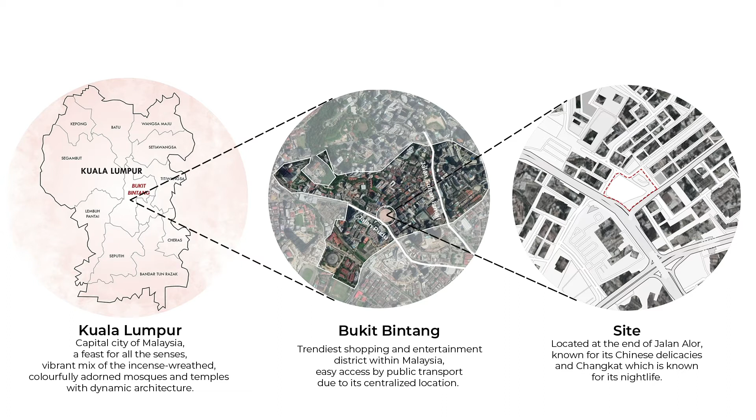Bukit Bintang itself is an enclave of Kuala Lumpur, harbouring many beautiful layers of life and forms within a developing urban setting. A city of movement, the life in Bukit Bintang never ceases, beating even until dusk, where the street lights and another new side of life start beating again until late night. However, in current pandemic times, it has also cast a large shadow while the public remains unaware of the many hidden perils of the site.

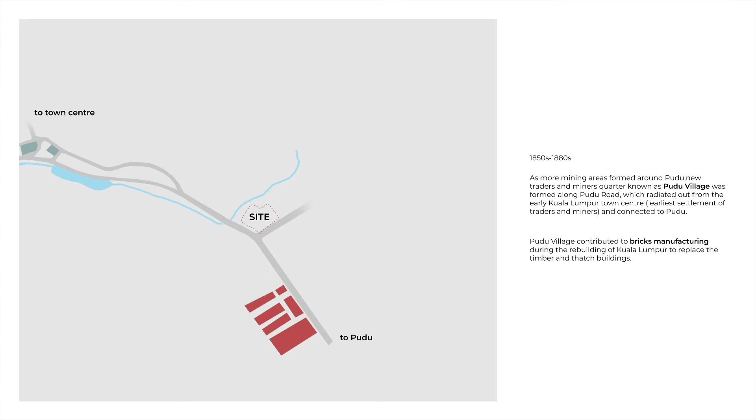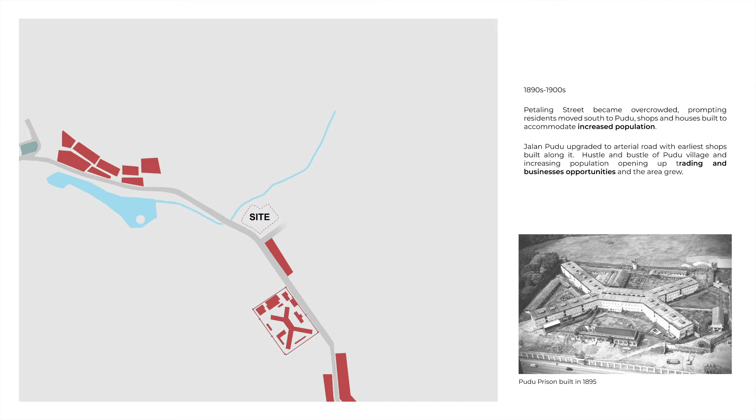In the 1850s to 1880s, as more mining areas formed around Pudu, new traders and miners' quarters known as Pudu Village were formed along Pudu Road, which radiated out from the early Kuala Lumpur town centre and connected to Pudu. However, in the 1890s, Petaling Street became overcrowded, prompting residents to move south to Pudu, and shops and houses were built to accommodate the increased population.

The increased population at Pudu settlement opened up trading and business opportunities, and the town grew. In the 1950s, after World War II, forest and agriculture land were cleared for commercial development, more Chinese residents and traders moved in, and low-rises, shophouses and housing were built for increased needs. Over time, the enclave became economically self-sustaining.

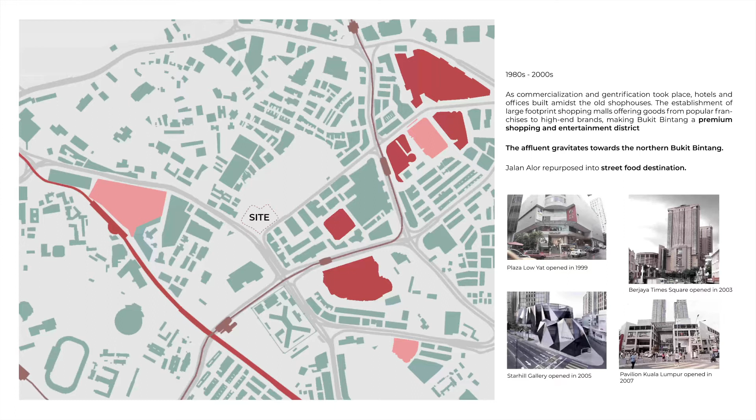In the 1980s to 2000, commercialization and gentrification took place. Hotels, offices and malls were built amidst the old shophouses, making Bukit Bintang a premium shopping and entertainment district. The affluent gravitated towards northern Bukit Bintang, and Jalan Alor was repurposed into a street food destination.

From 2010 to 2020, Greater KL became one of the national key economic areas. Urban connectivity of the Southern Golden Triangle was enhanced further. Bukit Bintang MRT station was built to strengthen business activity, and the migrant worker population grew in parallel with increased job opportunities, making it a city of migrant workers and locals.

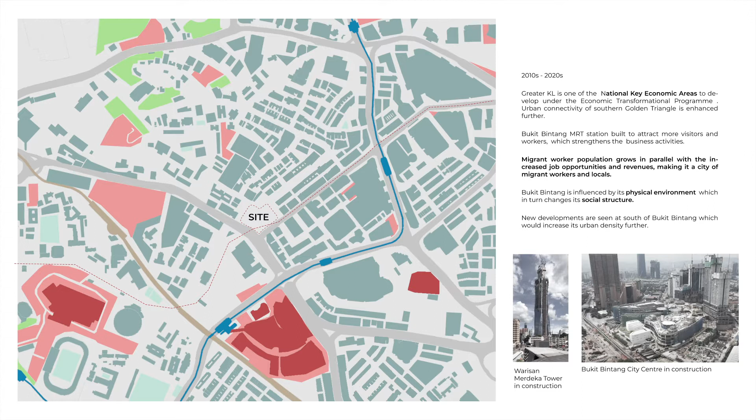The pedestrian pathway can be seen using different transparency of lines to indicate the densities of pedestrians from morning, afternoon and nighttime. High density pedestrian pathways are usually found along shop lots with a lot of attraction from the surroundings, while low density pedestrian pathways can be seen along the back alleys of the shop lots. The density of pedestrians highly depends on the activities in the surroundings, as these act as an attraction.

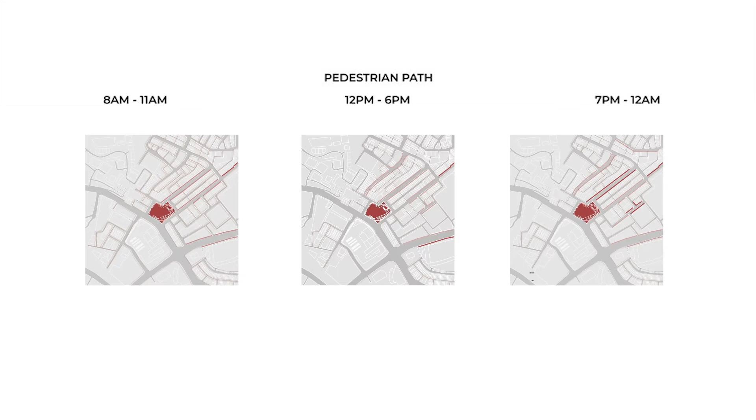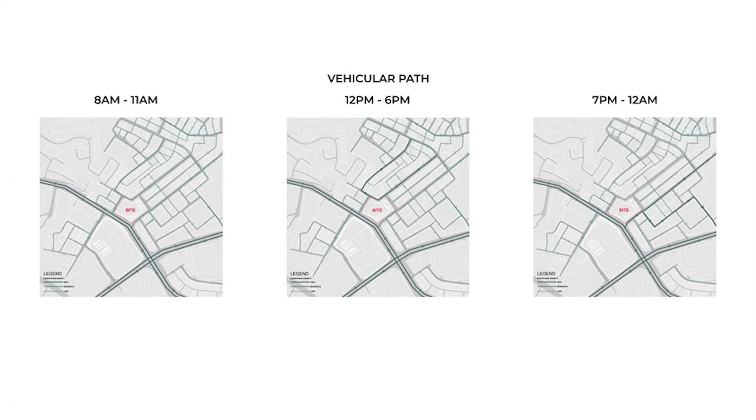The vehicular path can be seen at its peak densities in the afternoon during lunch hour, and before the night market starts along Jalan Alor. Jalan Sultan Ismail and Jalan Bukit Bintang can be seen with high vehicular densities, from the morning when people head off to work until late night when people go shopping as well as having their dinner.

The pedestrian density of Bukit Bintang consists of a huge contrast between daytime and nighttime. Social gatherings are observed more during nighttime, especially in Changkat Bukit Bintang and corners of Jalan Bukit Bintang. Meanwhile, Jalan Alor acts as a hotspot for locals coming to experience the food at night. The streets also indicate more migrant pedestrian density during noon, in preparation for the night activities.

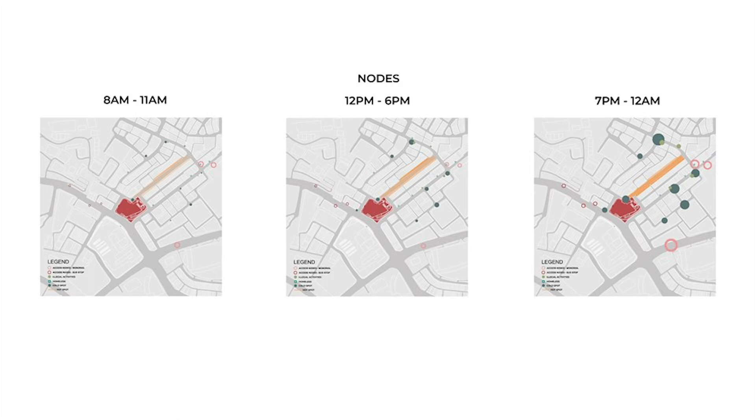Furthermore, homeless beggars are found within Jalan Bukit Bintang and Changkat Bukit Bintang during both day and night, whereas illegal activities increase more during evening and nighttime.

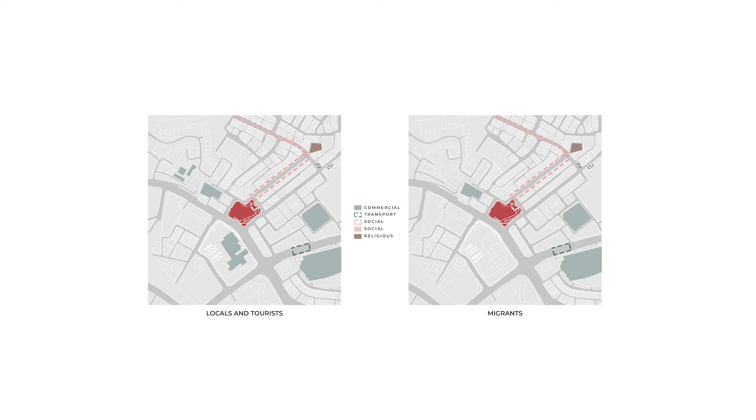As landmarks are objects or features of a landscape or town that are easily seen and recognized from a distance, different users tend to have different perspectives on what places they identify as landmarks. For locals and tourists, common landmark identifiers are Low Yat Plaza, Times Square, and even the Chinese Hill Maternity Hospital and the KL Baptist Church.

Let alone for the locals in the area, the Jade Garden apartment is known to be a residential area for some of the locals within the site. Jalan Alor is also known as one of the main social landmarks for locals, tourists and even migrant workers, as the street functions to serve most of the users, many of whom work there as migrant workers. In addition, next to Jalan Alor resides the residential area for the majority of the migrant workers.

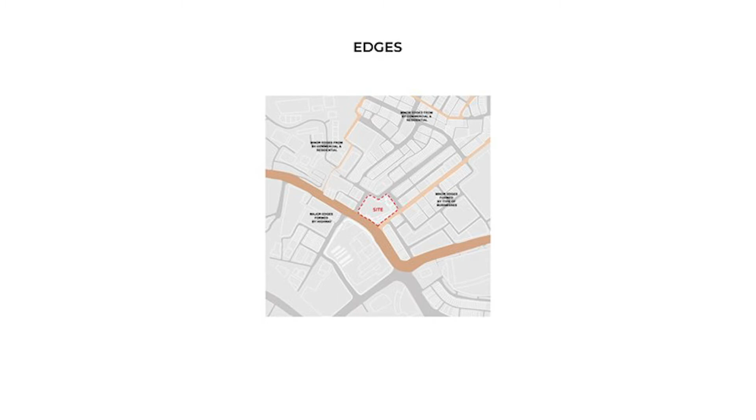The major edges can be seen along Jalan Pudu all the way up to Jalan Imbi, as these edges are formed by the highway. On the other hand, the commercial and residential area also forms a minor edge, while different types of activities and business happening in the area also form another minor edge. This clearly shows that major edges are permanent edges, while minor edges depend on ongoing activities and business in the area. The user groups around Site B are generally categorized into three categories.

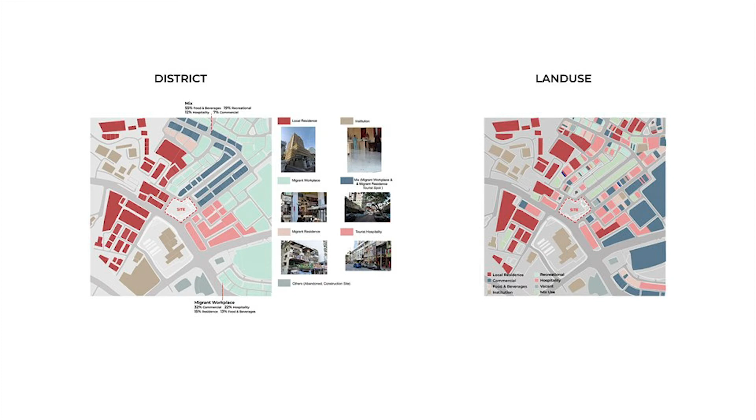Which are the local, migrants, and tourists. The district of the local is mainly residential and is surrounded by institutions such as schools and hospitals. Majority of the migrant district overlaps with the tourist district, as most migrant workers work in the commercial sector in tourist districts such as restaurants, massage parlours, and hotels.

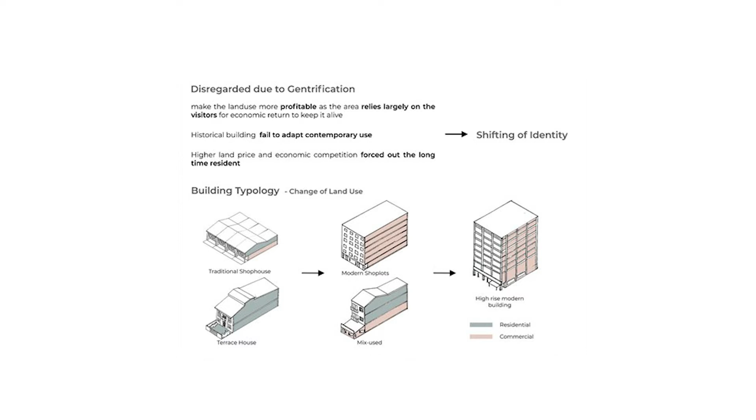The physical design of Bukit Bintang is mainly aimed at creating a high-end shopping precinct for visitors and business operators. Fine-grained shop house and housing typology allows denser urban streets and encourages higher intensity of life between buildings, which is slowly being replaced by coarse-grained modern buildings with larger footprints.

This transformation is due to gentrification. In order to make the land use more profitable, as the area heavily relies on visitors for economic return, historical buildings failed to adapt into contemporary use, making them less efficient and their utilization not optimal. High land prices and economic competition forced out long-time residents, resulting in the shifting of identity.

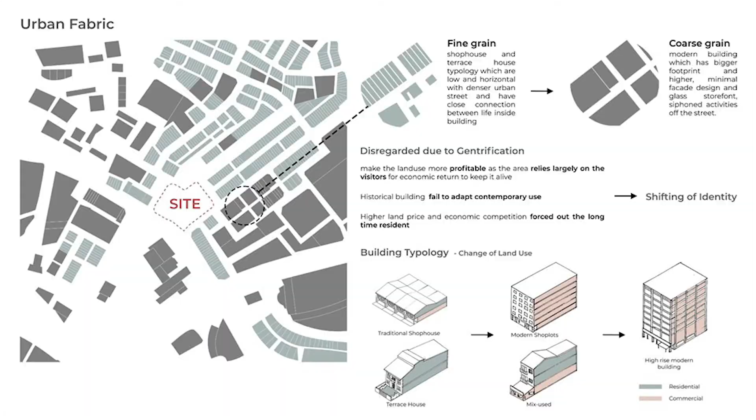Building typology and change of building use: the building typology starts with low-rise shop houses and housing built by Chinese residents, then transforms into vertical mixed-use buildings and shop lots with much bigger footprints, where commercial activity occupies the ground floor and the upper floor is utilized as living space for migrant workers.

Modern high-rise buildings in Bukit Bintang have fewer stores and activities happening at the ground floor compared to the surrounding fine-grain traditional buildings. Few traditional shop houses remain around the historical streets of Tengkat Tong Shin, Jalan Pudu, and Jalan Sin Chew Kee, in a poorly preserved state resulting in diminished cultural significance.

Modern transformation of Bukit Bintang as a shopping and entertainment district has ensued increase in population and financial profitability. Commercial and mixed development buildings of various scales replaced traditional shop houses, redefining the place's character.

Facade: building typology at Jalan Bukit Bintang has changed dramatically throughout the century, displaying a various collection of shop houses and high-rise buildings. The harmonious and continual visual quality along Tengkat Tong Shin is broken by modern structures, sudden changes of skyline, distinguishing from the humble traditional shop houses.

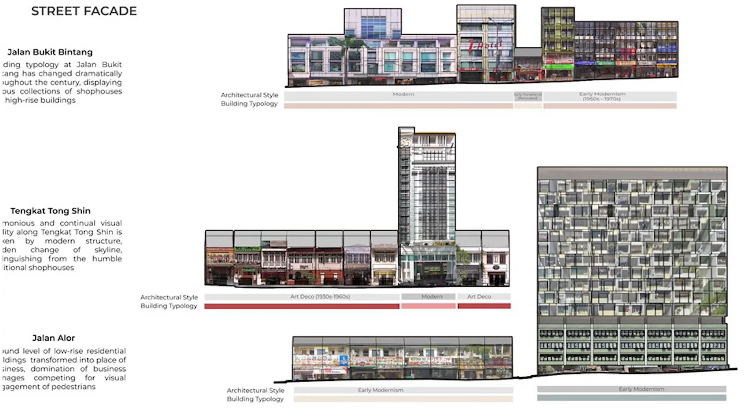The ground level of low-rise residential buildings transformed into places of business, with domination of business signs competing for the visual engagement of pedestrians. As Bukit Bintang becomes more compact and denser, social activities are encouraged at the front street. Main streets are vibrant with cultural reference and community identity, as house streets and alleys are being used.

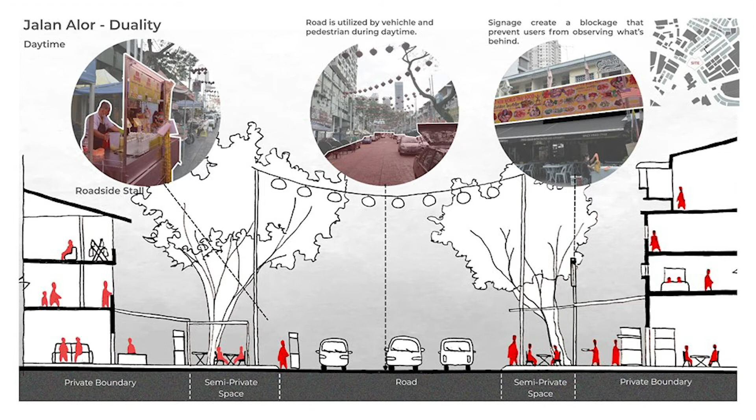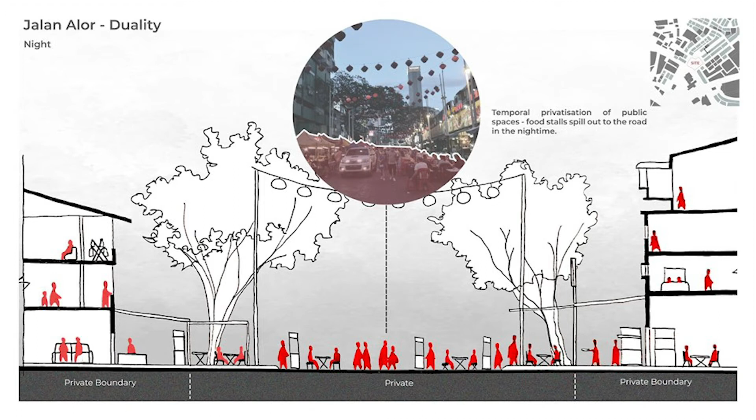Jalan Alor, duality: Jalan Alor is a famous food street with consistent low-rise buildings, giving a comfortable sense of enclosure. The land use starts off as residential and transforms to mixed use, with food and beverage businesses at the ground floor that extend all the way to the pedestrian path.

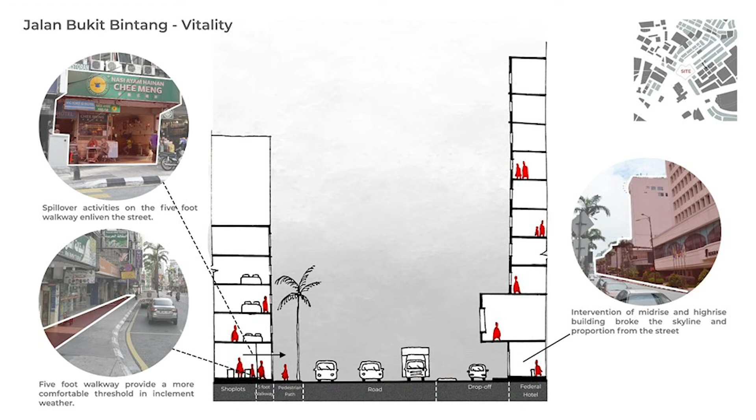Jalan Bukit Bintang, vitality: Jalan Bukit Bintang is a popular shopping street with high pedestrian and vehicle density. Spillage of business activity onto 5-foot walkways enlivens the street. The injection of modern mid-rise and high-rise buildings varies the skyline and proportion from the street.

Jalan Tengkat Tong Shin, belongingness: with the preservation of traditional terrace houses utilized for food and beverage business at the ground floor, it expresses the original characteristic of Bukit Bintang.

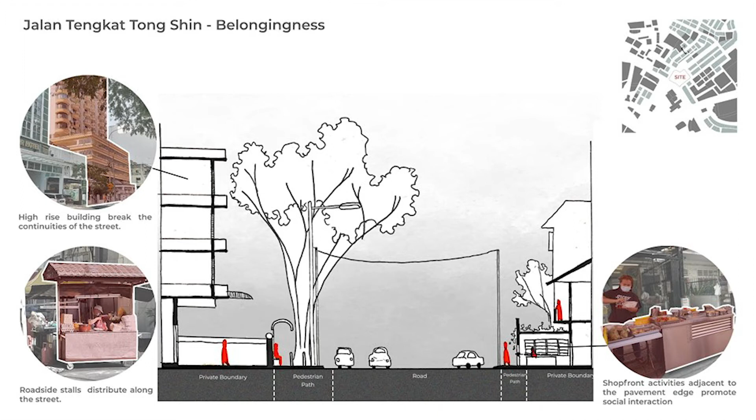Back alley of Jalan Bukit Bintang, confined: the back alley with a high level of enclosure is a transient space for pedestrians.

Jalan Rembia, vibrancy: Jalan Rembia as a back alley is rejuvenated through activities and purposes. The mural art makes a major contribution to giving the place character and identity, bringing people into and through places.

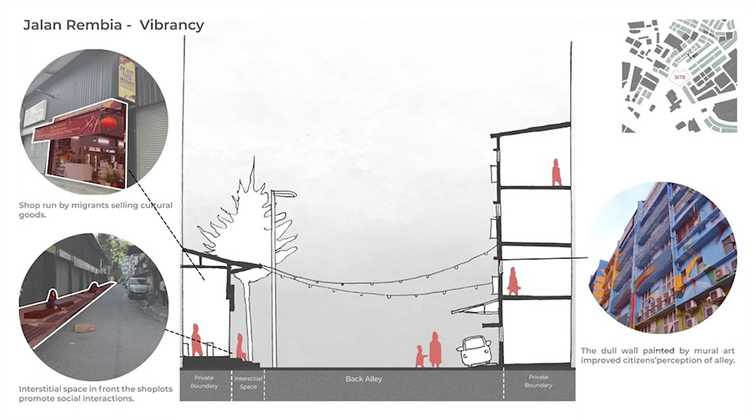For social aspects, it covers the different user group categories, which are the permanent insiders, temporary outsiders, observers, the human interaction, and the movement pattern as well as issues on site.

Behavior settings: in Bukit Bintang, the existing users are categorized as permanent insiders, temporary outsiders, and observers. Permanent insiders include local residents and local traditional business owners.

The current existing traces and presence of local communities is notably reducing due to the gentrification of economic and modern building developments. Seen from the local perspective, they are slowly losing their sense of belonging to the place, as nowadays youngsters are moving out from the old streets of Bukit Bintang, and the rapid frequency of building development leads to the fading traces of existing local pride.

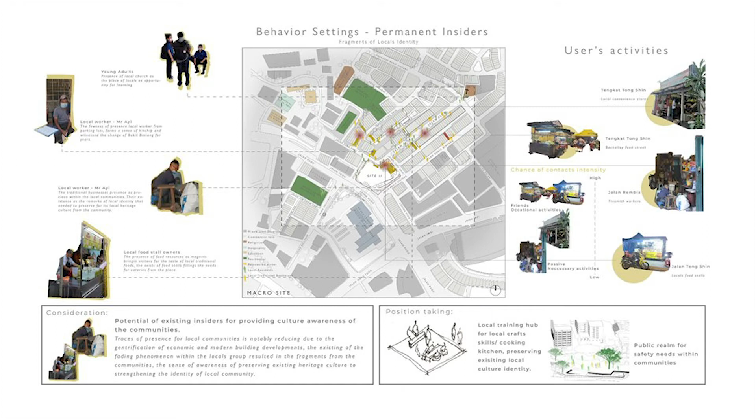Temporary outsiders: the existing communities of temporary outsiders include migrant workers and migrant residents, homeless people, drug addicts, and prostitutes. This user group stays in the old streets of Bukit Bintang for purposes or aims related to changes in economic status, leading towards the empowerment of economic stresses and social pressure from survival around the site.

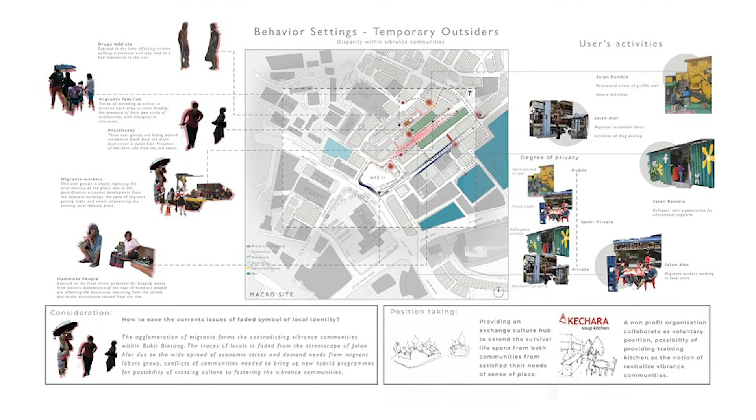With the appearance of vibrant communities comes the presence of a culture barrier, giving a downfall of impression onto the site. The migrant group are parasites within the old streets of Jalan Alor, living in between the conflict of cultural belief with local communities inside, creating two parallel dimensions of communities lacking the intersection between human cultural interaction.

Observers: the observers include tourists, local visitors, and students. The presence of a young adult user group from local communities and migrant communities forms their own educational institution, from their own formalizing way of educational institution.

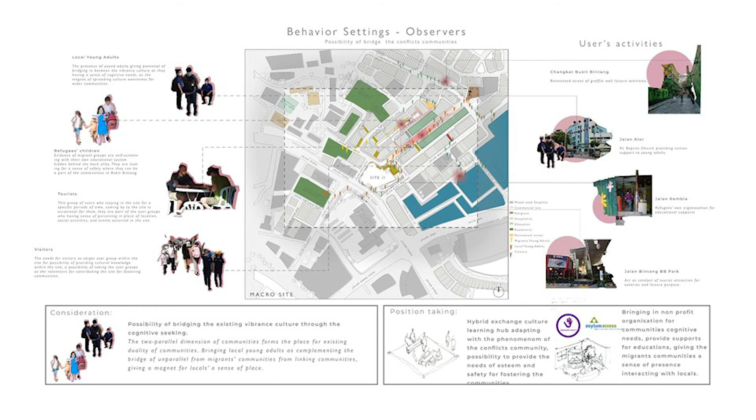The duality of existing communities is needed to provide support for extending their survival span, especially towards the existence of migrant children communities. Living conditions within Jalan Rembia are very poor.

Social issues on site: a bustling street such as Jalan Alor and Jalan Bukit Bintang are known for its progress over the years. However, what most people are not aware of is the conflicting parallel dimension of different user groups going on at the same time. Homeless people, who are largely comprised of the elderly and the mentally ill, can be seen around the area.

Their presence increases whenever there are visitors on site, as they aim to beg for money.

In conclusion, a place with its own characteristics offers its own identity and belonging to the people. As such, the community's needs prove that the contact points of a place enable the intersection between different user groups, movement patterns, and social needs.

For the movement pattern, we analyze the pedestrian movement by tracking user groups: permanent insider, temporary insider, and observer. During the day, the densest area is Jalan Alor.

Cognitive needs of learning, education and expressing are shown by the trail of the permanent insider, as they can be seen at schools and banks.

Affiliation needs for a sense of belonging to culture are also shown, as the trail leads to local residential areas, old shops and religious buildings. Survival needs of the temporary insider within the community are seen, as a lot of migrant workers walk through the back lane and through shop houses to get to their place of work.

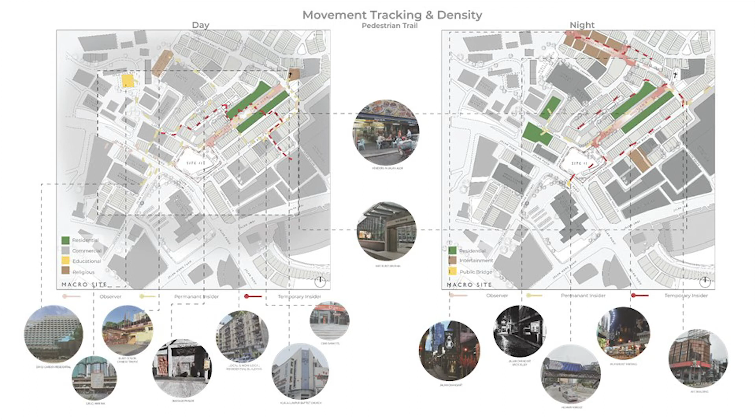Note that during the night, the permanent insider and observer rarely walk through the back alley, while most temporary insiders use the main and back lanes during the night.

In the visual dimension, explaining the social issues within Bukit Bintang could be boiled down into three main categories: the locals' dissatisfaction, the migrants' cry, and in between these issues is the parallel duality that exists within Jalan Alor.

It's been observed that locals in Bukit Bintang show a strong distaste towards the migrants, and some are even calling them cultural bandits, as they are slowly taking over the site's identity in Jalan Alor.

Locals also feel uncomfortable towards each other and feel there is not enough coverage, and finally there is a lack of understanding of the economic dependence of migrant workers on site.

The migrants' cry. Surprisingly, the worries of the migrants and locals differ drastically in the present time. Due to job instability in COVID, migrants are more worried about their livelihood than locals' opinions towards them.

Although most of the migrant workers were documented, they still appeared to be very uncomfortable when approached, and often refused to interact.

Due to cultural differences, some migrant workers appear to be ill-mannered in Bukit Bintang, thus making people feel unwelcome.

To further their worries, documented versus undocumented migrants receive pay and benefits differently, and with the pandemic pressure upon them, their future doesn't seem to be bright down the road.

Lastly, to conclude the social issue, we determine that the parallel duality of Jalan Alor embodies the issues of the site: the rift and segregation between the migrants and locals caused by a lack of intertwining and interaction.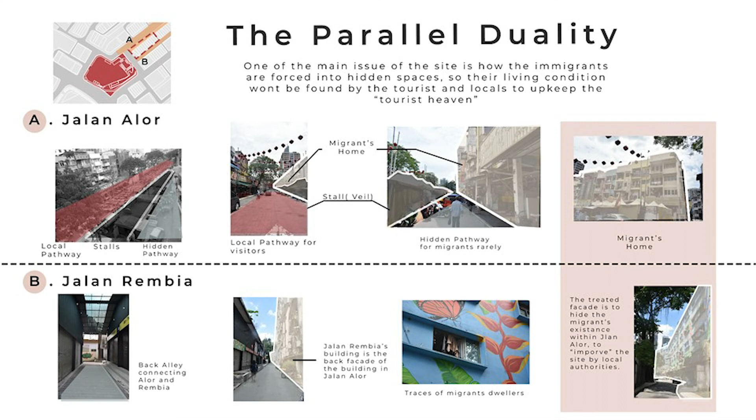The lightly shaded facades are the migrants' homes, only accessible from behind the stalls on the main road, where it's dirty and not well-kept. Furthermore, the back alley of Jalan Alor, Jalan Rembia, has a large peripheral graffiti used to make the real Jalan Alor facade distinguishable from the rear, making visitors unable to find traces of migrants within the building, as if they were a negative influence.

Introduction to the microsite. Zooming into the microsite, site section A cuts along Jalan Alor, showing a slight slope in context. Site section B reveals the difference in level of the adjacent roads.

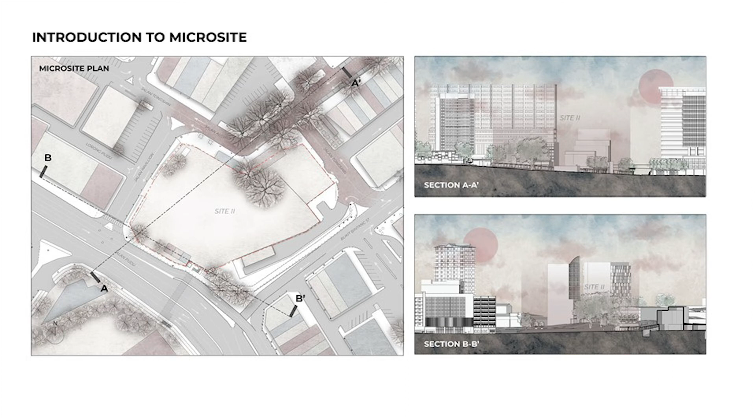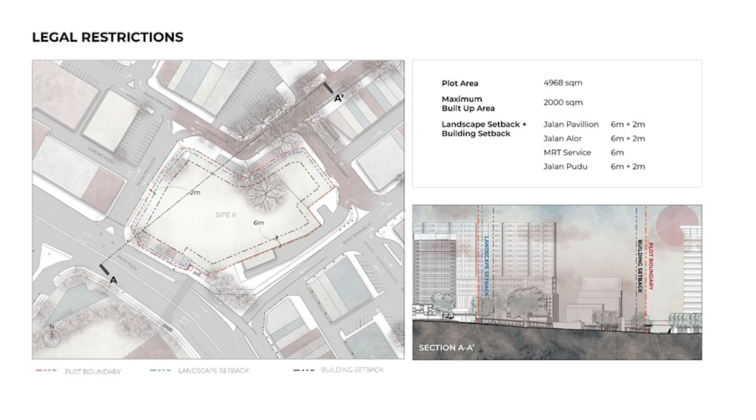Legal restrictions: the plot area is approximately 4,968 square meters with a maximum built-up area of 2,000 square meters. The building setback required is 6 meters, with an additional 2 meters for landscaping.

Softscapes of the site consist mainly of angsana, along with some fiddle fig trees as well as wild cinnamon, while palm trees are located beyond.

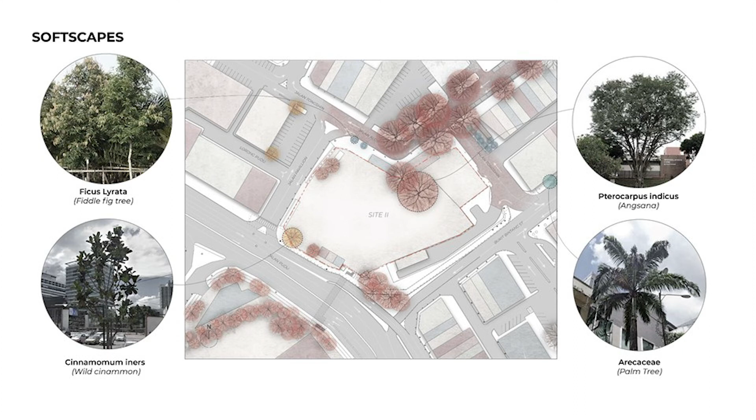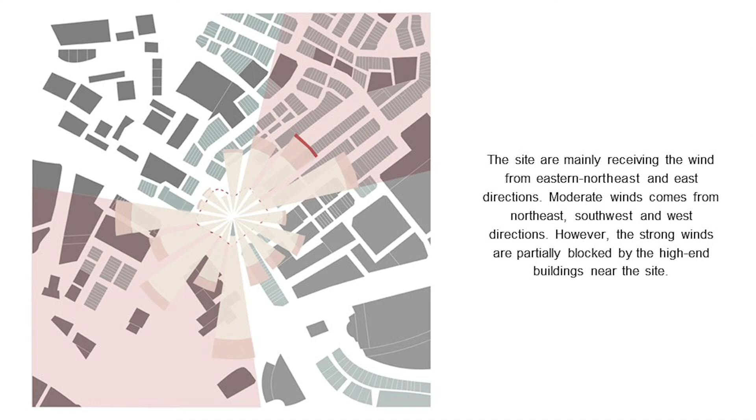Wind pattern: the wind mainly comes from the northeast and east direction of the site, but is partially blocked by the high-end buildings.

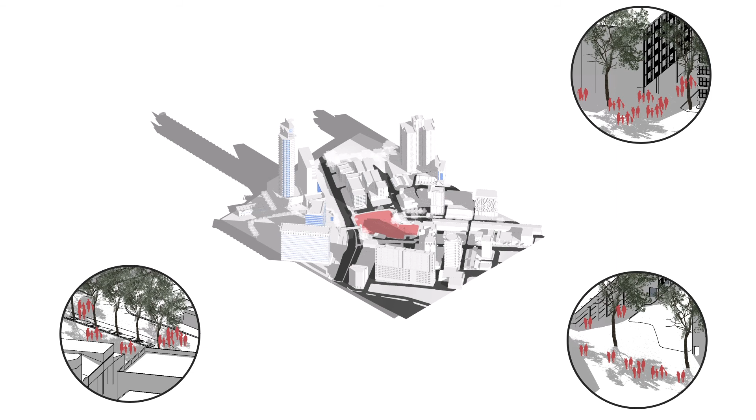The late noon sun creates an east orientation and short shadow pattern, which results in short term stay, partially activated area, and moderately shaded vegetation area.

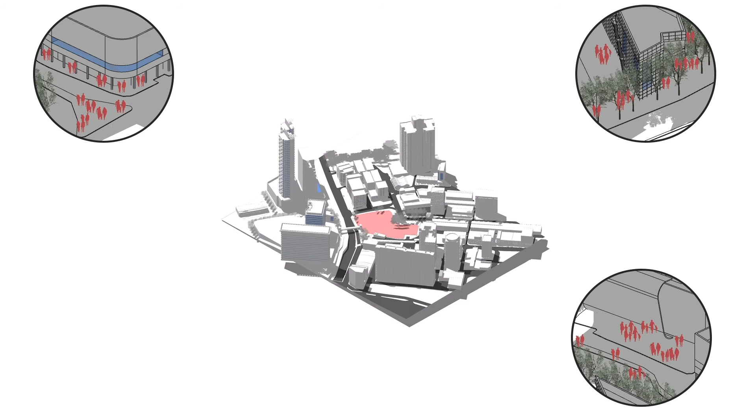The evening sun creates an east-oriented and long shadow pattern, which results in long-term stay, highly activated area, and efficiently shaded vegetation area. Excessive shading is provided at the corner of the site in the morning, and the highly shaded area is at the west of the site in the evening.

The flow of pedestrians is very low in the solar radiated site during noon. Excessive shading is provided at the site corner in the morning, but the highly shaded area is at the west of the site in the evening. The flow of pedestrians is very low in the solar radiated site during noon.

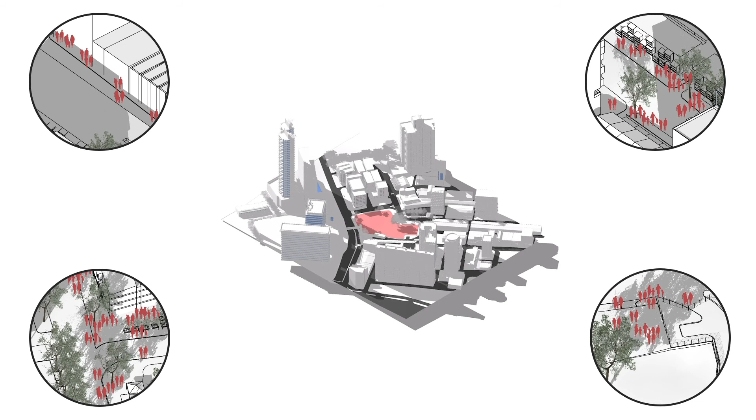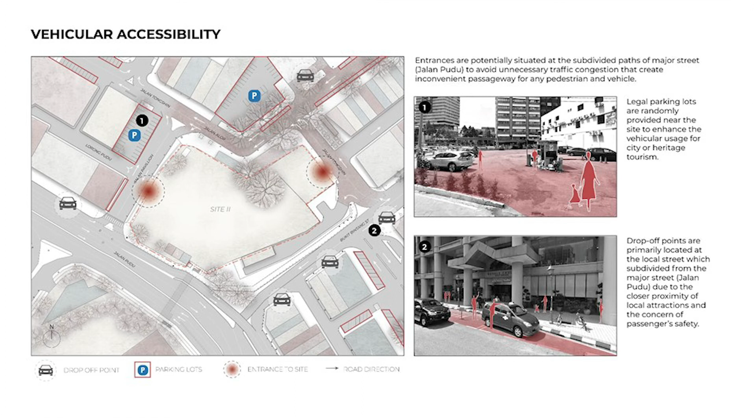Vehicular accessibility. The site consists of an entrance that creates convenient passageway surrounded with parking opportunities and drop-off points that enhance local tourism. Walkability and existing structures.

Walkability of the site is enhanced by street vendors, shaded pedestrian walkway, pedestrian bridge, and site canopies. However, it is declining due to inconvenience brought by MRT service.

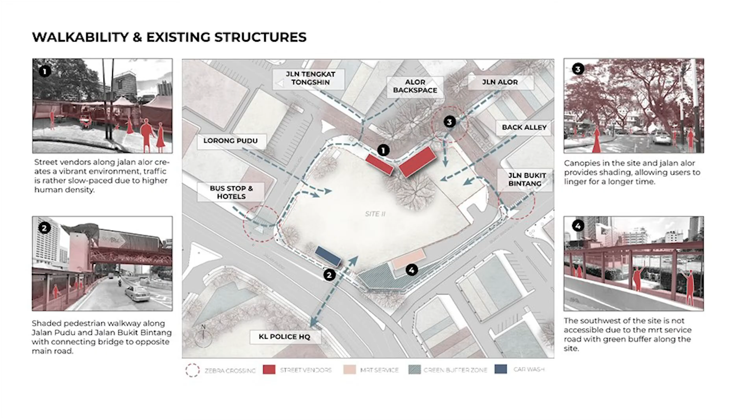Views from site. The site was surrounded with different urban layers such as greeneries, bold buildings, and shaded pedestrian walkway at the north, while heritage core areas, services and urbanized street at the south.

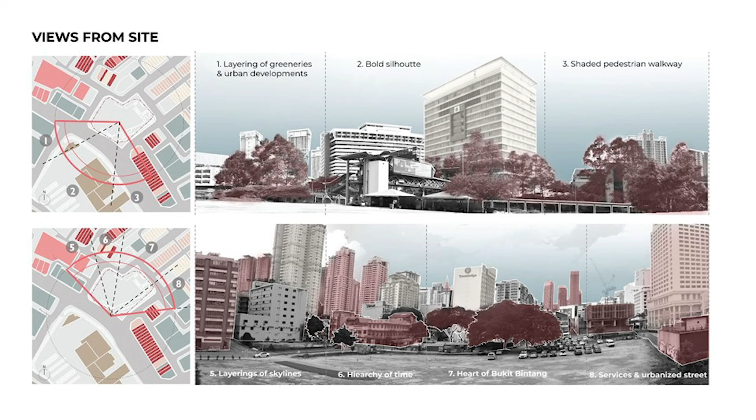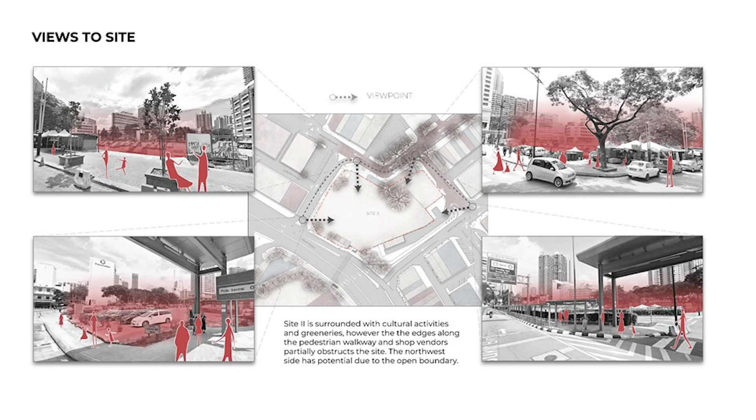To conclude the microsite with SWOT, the strength of the site is connected to the endpoint of each street and tourism hotspot, which gains a lot of pedestrian attention while also maintaining a very strong surrounding context connection to the current local site identity. The site is also located within the Golden Triangle Economy Zone, thus making the area still growing and attracting more potential programs.

The weakness, however, includes the lack of green spaces, noise and air pollution as the site is adjacent to the main highway, with very limited shading on site and poor accessibility as it is surrounded by hard edges, making it hard for users to access the site.

As for opportunities, the local context relationship could be improved and many cross-cultural programs could be carried out to improve livelihood and finally potentially rejuvenate alleyways as a design drive for the community.

The threat on site is the locals' authenticity being challenged with the arrival of immigrants. Furthermore, existing user groups of drug addicts and prostitutes affect local business operations due to disturbance from their presence on the street frontage, and the MRT access tunnel creates a design constraint.

In the tropical climate of Hoi An, Vietnam, the Cam Thanh Community House consists of 3 interconnected pavilions equipped with movable partitions, making spaces flexible and adaptable to cater to various events. The partition provides the house with 2 layouts, whereas one is exhibition-based and the other is a multipurpose area.

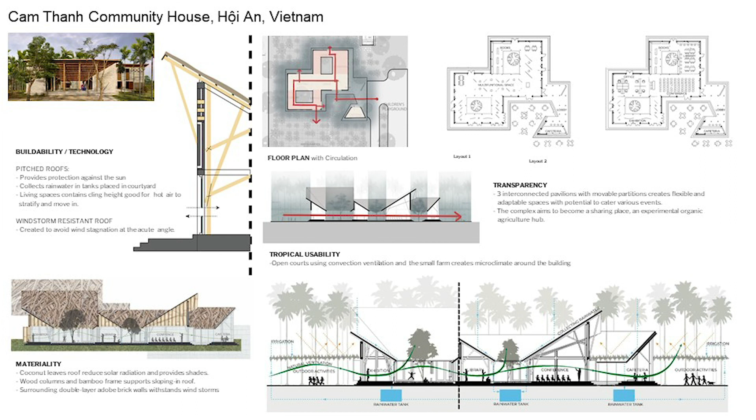Precedent Study 2. Next is the Zhangjiang Future Park of Shanghai, China, where it shares similar urban context of a given site, being encompassed by intersecting main roads, a river, and similar demographics of workers and locals.

Its civil program provides a library, an art center, a performance center, and a sports center which are absent in the neighborhood for catering to its users. The park programs offer an inclusive environment for the majority, unbound to a specific practice, such as the jogging path and rooftop walkway creating connection between various programs.

In short, the site can improve social issues by providing adequate civil programs for migrants and locals, improving the quality of lifestyle.

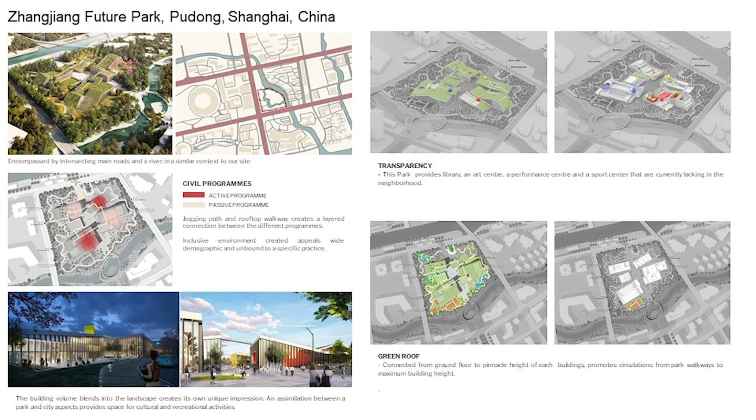Impact analysis. The impact of the project is to allow migrants to live with pride and confidence with a sense of belonging while preserving the locals' identity and migrants' culture as a new addition to new layers. In order to further

instigate harmony within the site, hybrid learning is needed to create collaboration, to create something new in combination of local and migrants, and creating a strong community as a result that builds upon layers of trust and confidence.

For the impact of users, youngsters such as local artists can use the space for innovative movement and activities to promote cultural crossing, while the local dwellers are here to provide support and live in harmony with the migrants. As for migrants, it becomes the center of extraordinary meaning to the already vibrant community.

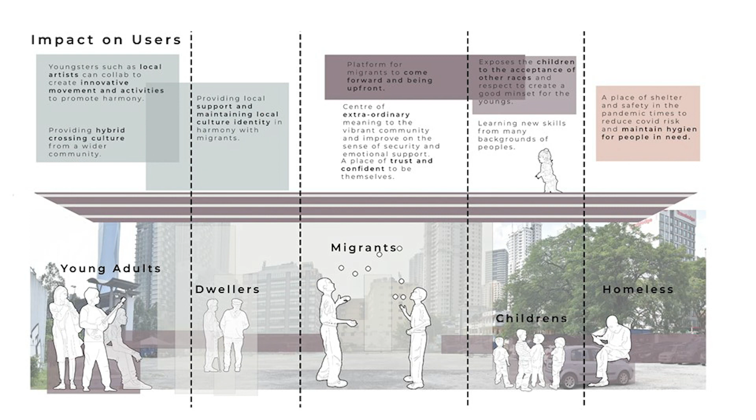Young children could learn new skills and also learn the acceptance of other races to instill a good mindset. Finally, for the homeless, it's a shelter for the pandemic to maintain hygiene.

Taking the presence of social issues, aligning with design position, which brings new possibilities of programs to the site. Food culture should be brought into the urban room programs to welcome publics and communities within the site. The analysis of social, which is the need of user groups from site, is the need of cognitive and belonging.

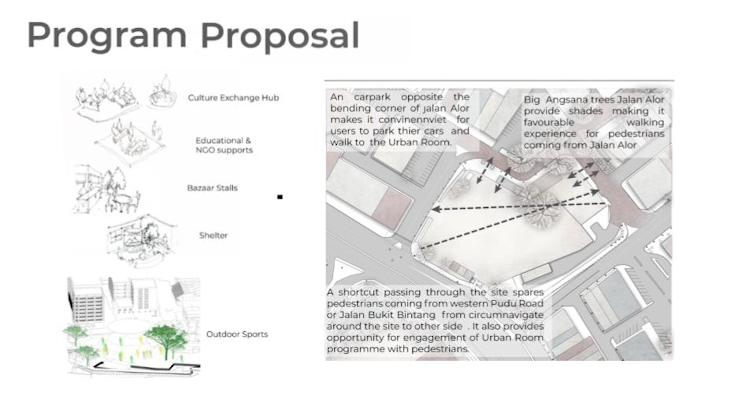Due to the presence of conflict of vibrant communities, the existing organization of Kechara Soup Kitchen Society, the NGO organization, supports psychological needs of shelter to homeless communities and refugee communities who exist on site for the needs of survival living. Perhaps there is a chance to provide a place to give them a sense of belonging to our country.

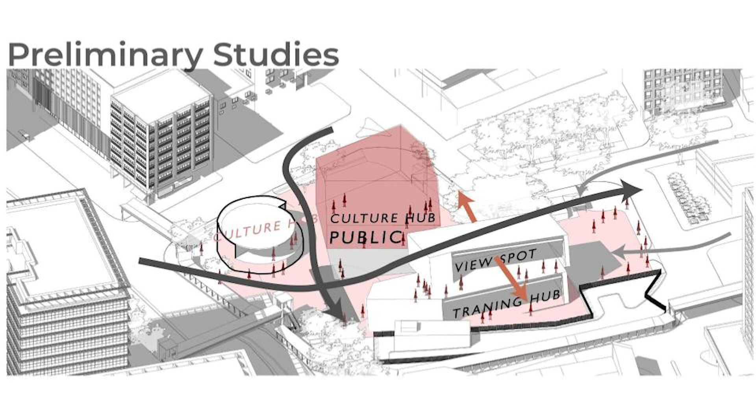Pathways from the highway and from Jalan Tongshin can create an interaction of encounter established within the site, surrounded with a cultural hub, training hub, and a view spot that lets the eye see as far as it can. This creates a harmony of encounters of two different demographics on site to learn, create, and exchange within the urban setting as a form of escape.